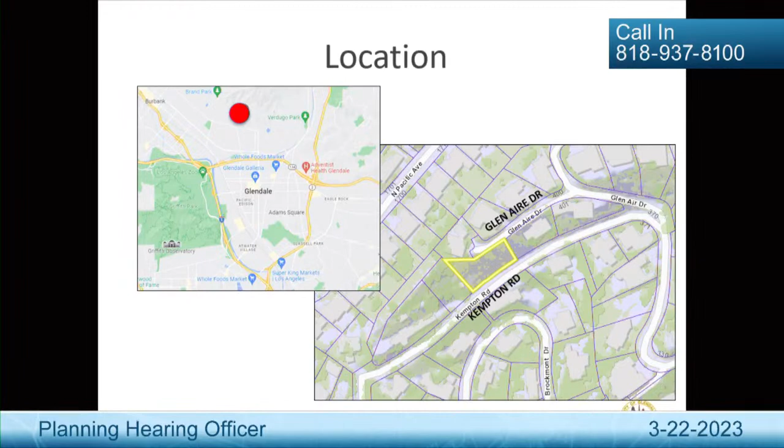Thank you, and good morning, hearing officer and members of the public. I'm Cassandra Pruitt. I'm the case planner for the project, as described by the hearing officer. The subject site is located in North Glendale at the southerly terminus of Glen Aire Drive. The lot fronts Glen Aire Drive at the top and Kempton Road at the bottom. The property features a 10,471 square foot vacant lot on a steep hillside. The average slope is about 69%.

The site is located in the R1R-2 zone, which means it's the restricted residential zone with floor area ratio District 2. And what that means is that the zoning requires a 15-foot setback facing each street, a 10-foot setback on the sides, and a maximum total floor area of 3,037 square feet. A new single-family home is exempt from review under the California Environmental Quality Act, and there are no protected indigenous trees located on the site.

2 oak trees are located to the west of the site, about 20 feet away, as indicated at the lower left of this slide. The site also features 2 easements, indicated by these red polygons here, and they're a storm and a sewer easement, and no construction can occur over those easements.

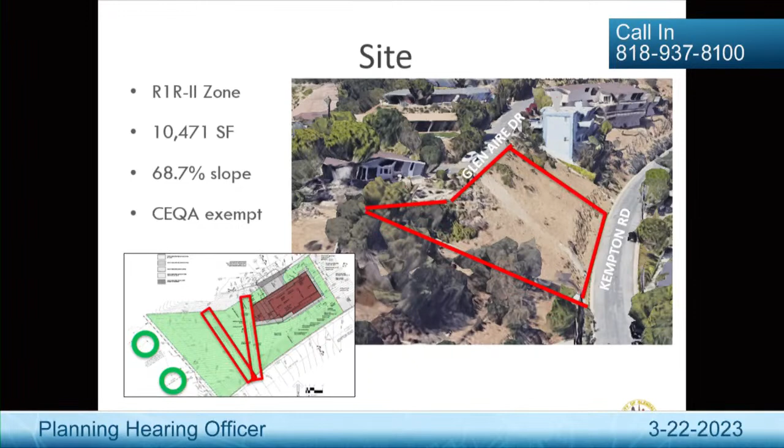Compared to other lots on the street, the subject site is shallower than any other on the street, since it is just over 60 feet deep at its narrowest point for approximately an 80-foot length. This results in a smaller buildable area, and because of the easements to the west, the 2 15-foot street front setbacks and the 10-foot setback at the side, the resulting buildable area is just 1,340 square feet.

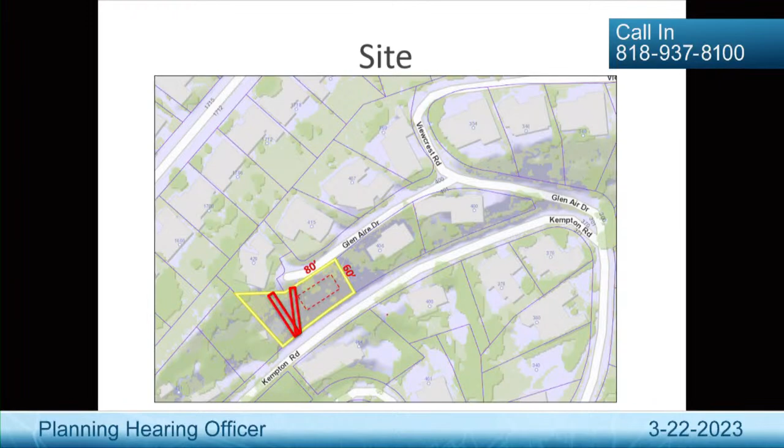Another feature of this site that impacts the development is that Glen Aire Drive has a narrow street width. Like other properties on the street, on-street parking will now be prohibited directly across the proposed driveway, which is located here on the slide, to ensure that vehicles can pass. However, the subject property still needs to have enough room to accommodate a vehicle temporarily while that vehicle is entering or exiting the site, and without that vehicle extending into the street and obstructing traffic.

In this case, there is a 3-foot to 5-foot wide area that's the public right-of-way outside of the roadway that helps to provide some area for a car to enter and exit the subject site, even if it has a shortened driveway. A further constraint in terms of the driveway is that the site slopes from east to west, in addition to sloping north to south.

So the driveway, as shown on the left of this slide, has different slopes at different points along the driveway. So it's sloping down at one point, level at another point, sloping up at another point. This results in less flexibility to design the driveway to comply with the maximum required slope standards, and it diminishes the ability to slope the driveway down even further to push the building into the hillside in compliance with the design standards.

To the north of the site, which is toward the top of this slide, Glen Aire Drive features one-story homes. To the south, below Kempton, are homes that have two-story volumes. To the east, there's homes with three-story volumes. And to the west of the site is a vacant lot, and beyond that, a two-story home.

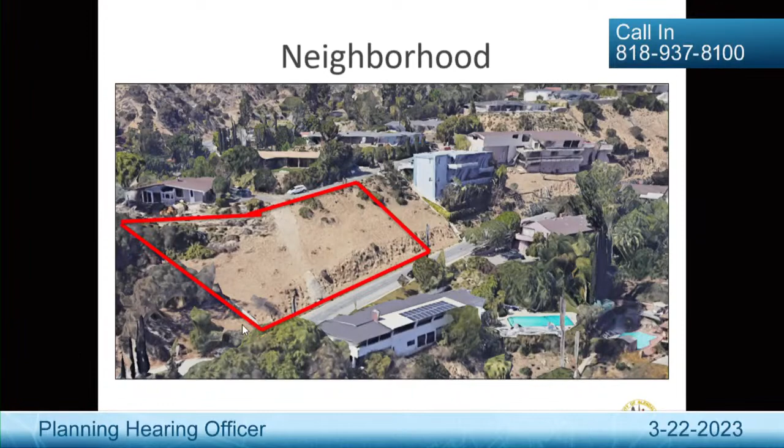As a note, there are 2 other properties on Glen Aire Drive right here that have non-conforming front setbacks. 429 Glen at the end of the road has a 9'6" front setback, and 407 Glen, a couple houses down, has an 8-foot front setback, and both of those were approved through variances.

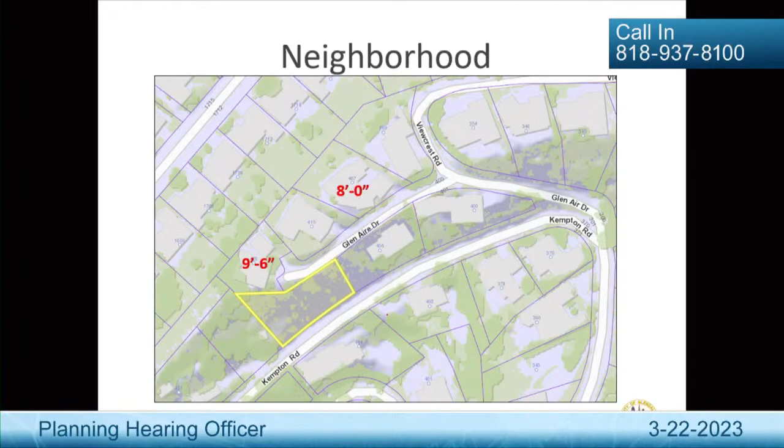The proposal under consideration is to build a 3-story, 3,430 square foot house, which includes a 503 square foot attached garage. 500 square feet of the garage is exempt from the floor area ratio calculation. The project proposal includes providing, as the hearing officer mentioned, a 10-foot front setback instead of a 15-foot front setback, a 15-foot driveway length instead of an 18-foot driveway length, and an 18-foot garage depth instead of a 20-foot garage depth. The house appears as a 1-story as viewed from Glen Aire Drive, which can be seen on the top right corner of the slide, and as viewed from Kempton Road, it appears as a 3-story volume.

The middle image on this slide is a good reference image for the issues the site has in complying with the development standards. On one hand, the front setback standard and the minimum driveway length and garage depth require the building to be pushed away from Glen as shown on the left red arrow. On the other hand, Glendale's comprehensive design guidelines call for the building to be pushed into the hillside and to step with the topography. The project is not able to comply with both of those standards while still resulting in a functional building design.

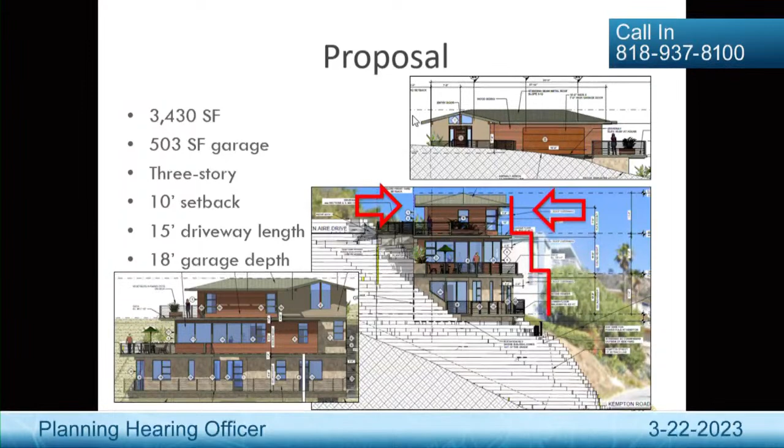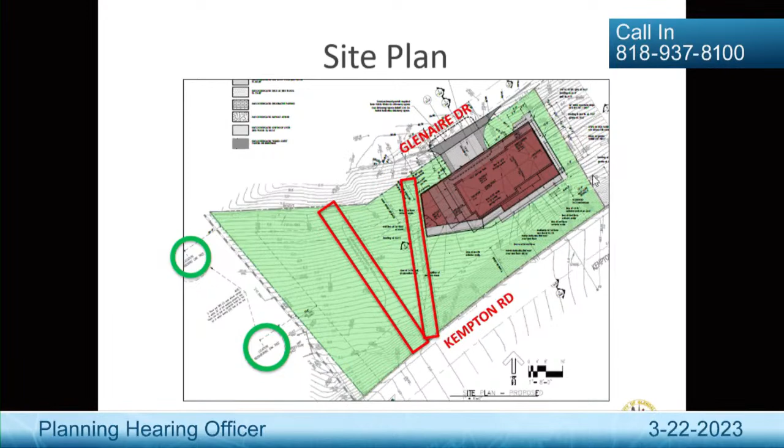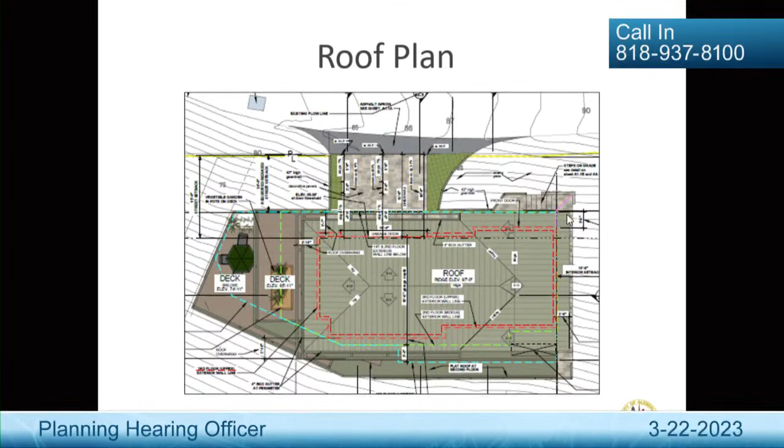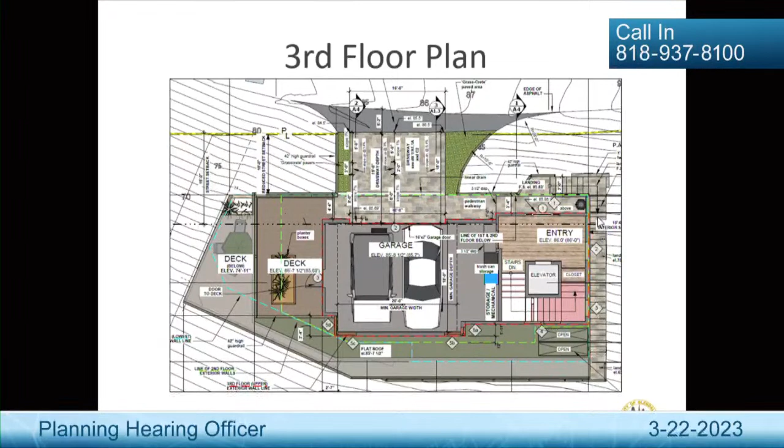The building is accessed from the 3rd and top level that is adjacent to Glen Aire Drive. The part of the building at the driveway entrance actually meets the 15-foot required setback. The rest of the facade ranges between about 13 feet to about 14 feet. The garage and entryway areas have been designed to maximize facade stepping in compliance with the design guidelines, and to maximize efficiency of floor area use. The second floor features a small deck area, which has been minimized in size to not wrap the entire building in order to comply with the design guidelines.

The first floor is similarly designed with reduced deck sizes and modest bedroom sizes. While this is not a review of the project's compliance with the design guidelines, what this shows is that the project's design is constrained and the locations and size of floor area are minimized to achieve the requirements of the design guidelines. So there isn't a lot of available area to remove in order to get the building to meet the setback and driveway standards.

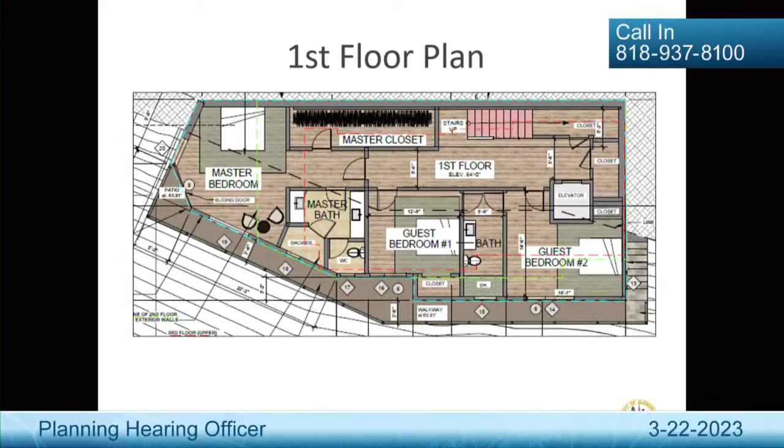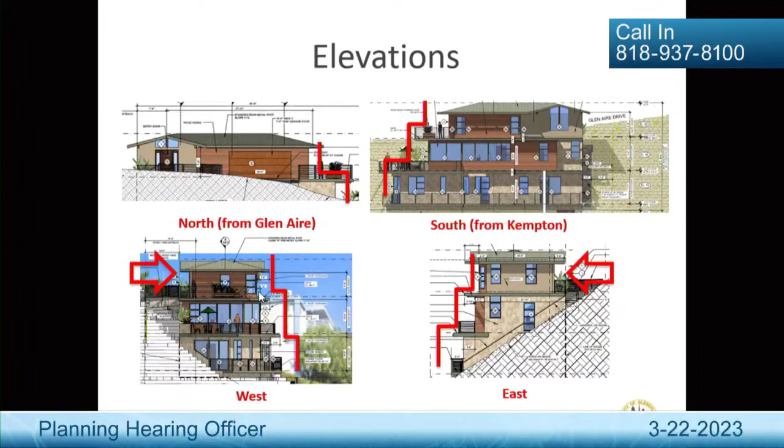And I will now run through the required findings of fact for a variance and summarize how the project demonstrates that they meet those. The first required finding of fact is that the strict application of the provisions of any such ordinance would result in practical difficulties or unnecessary hardship inconsistent with the general purposes and intent of the ordinance. Due to the numerous constraints on this site that I've outlined in this presentation, to require the project to comply with the required setback distance off of Glen Aire Drive would result in the building sticking out of the hillside and not complying with the design guidelines, which call for it to be pushed into the hillside and to step with the topography. If the building were to comply with both standards, it would become so narrow it wouldn't be practicable to occupy.

The second finding of fact is that there are exceptional circumstances or conditions applicable to the property that do not apply generally to other property in the neighborhood. The site has several exceptional circumstances not applicable to others in the neighborhood, including the shallow lot, 2 easements prohibiting any construction over them, having a steep slope of 69% that's not common to other lots on the street, and in combination with the 2 street front setbacks, having just a 31-foot deep potential building pad.

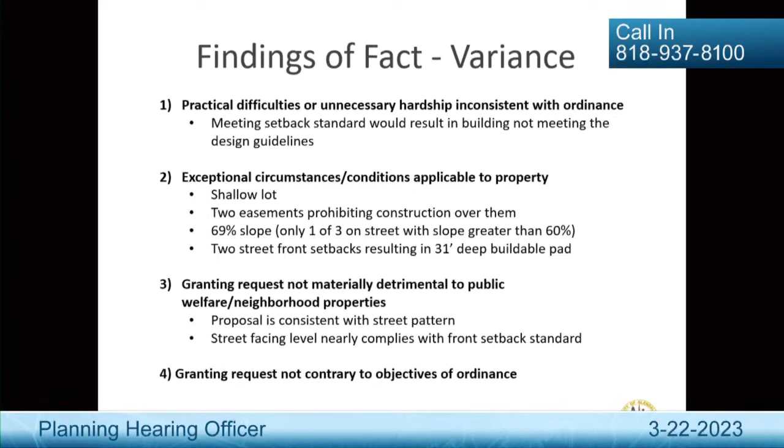The 2 administrative exception requests are for a minor variance in dimensions required for the driveway length and garage depth. Specifically, again, a 15-foot long driveway instead of an 18-foot long driveway, and an 18-foot long garage depth instead of a 20-foot garage depth. So I'll now run through the required findings of fact for an administrative exception and summarize how the project demonstrates them.

The first required finding of fact is that the granting of the exception will result in design improvements or there are space restrictions on the site which preclude full compliance with code requirements without hardship. The design improvement is that the building will be able to comply with the design guidelines, since without the exception it would not be able to comply.

The second required finding of fact is that the granting of the exception with any conditions imposed will not be materially detrimental to the public welfare or injurious to the property or improvements in such zone or neighborhood in which the property is located. This finding can be met because the project has been carefully designed to minimize any negative result from not complying with the standards. The driveway has been designed to incorporate a 3 to 5 foot area of the public right-of-way that is outside of the roadway, and which results in the equivalent of an 18-foot long driveway, which ensures sufficient access to and egress from the garage.

The project is also at the end of a dead-end street with minimal traffic, which minimizes potential conflicts with other vehicles. Additionally, an 18-foot garage depth is sufficient to accommodate a vehicle, as evidenced by the fact that the zoning code allows this depth of garage by right under certain circumstances. Finally, Public Works will require removal of street parking adjacent to the driveway, which is consistent with other driveways on the street, and which will ensure sufficient roadway width.

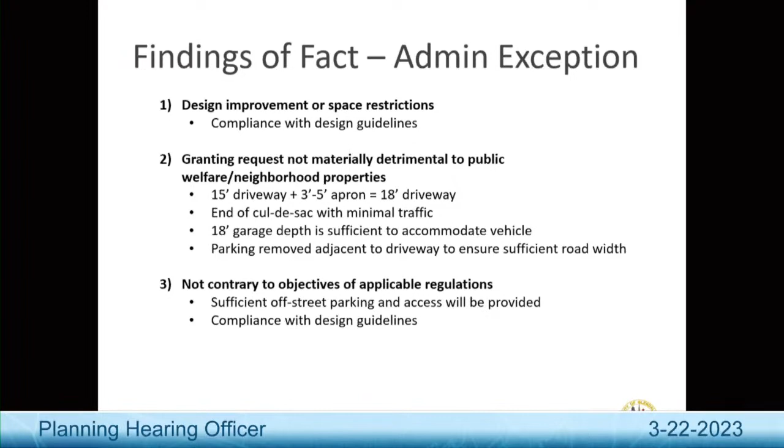The third required finding of fact is that the granting of the exception will not be contrary to the objectives of the applicable regulations. This finding can be met because the project will achieve the objectives of the ordinance to provide sufficient off-street parking with functional access to and egress from that parking. In conclusion, the requested variance and exceptions are sensible and afford the owner a fair opportunity in developing a vacant property similar to other residences in the immediate vicinity.

As a note, one public comment was received regarding the project and was shared with the hearing officer. He summarized it earlier. The letter is from a neighbor who lives 1.5 miles away from the site and who opposes construction that doesn't comply with the standards or significantly changes the look and charm of the neighborhood. As I believe has been shown in this presentation, the proposal is consistent with the neighborhood pattern and the requests for relief from code standards are reasonable.

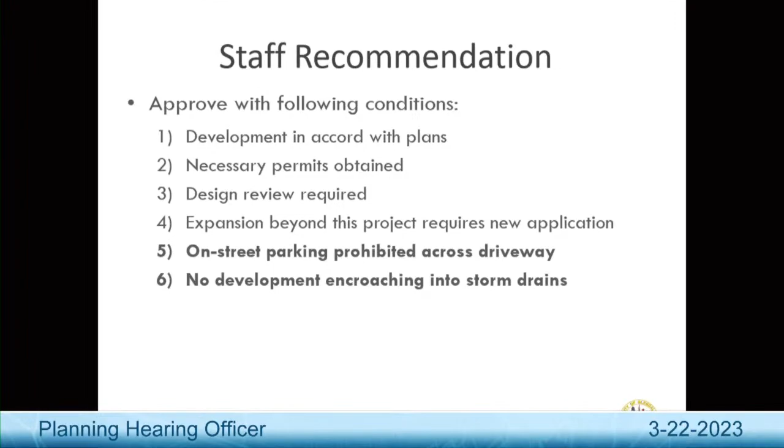Based on the information just presented, the staff recommendation is to approve with conditions, with the 6 conditions as described in the staff report and shown on this slide. 2 of the conditions are to restrict street parking adjacent to the driveway and to not build over the easements. And the remaining 4 are standard conditions of approval generally placed on all projects. That concludes my overview of the project. Thank you.

Thank you, Ms. Pruitt. I don't have any questions at the moment. Now I'd like to call up our first speaker, which is going to be the applicant, Mr. Von Trammell. May I ask you to come up to the podium? You've got 15 minutes to speak. Please state your name and your address. Yeah, let's give your quick presentation.

My name is Von Trammell. Address is 1912 Benicia Avenue, Los Angeles, California, 90025. And go ahead, if you have anything to speak, do you have a presentation? Just, thank you for all the work Glendale staff has done. My presentation will be a little bit repetitive, so I apologize for that.

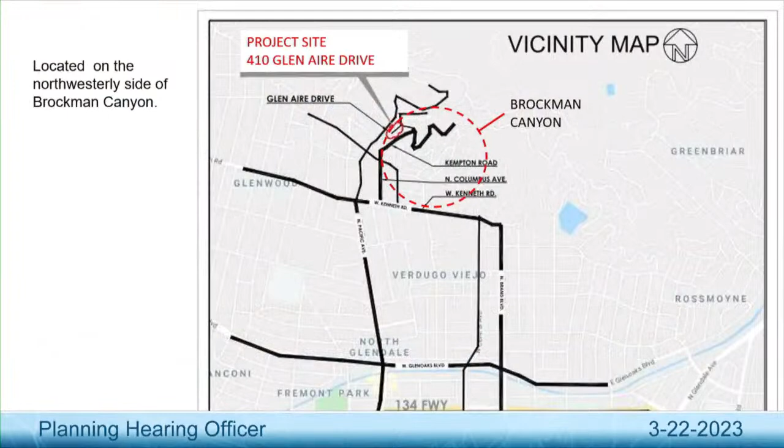So we are requesting the variance to reduce the street setback from 15 feet to 10 feet. The administrative exception to allow a 15-foot driveway instead of 18, and an 18-foot garage depth instead of a 20-foot depth. The property is located on the northwesterly side of Brockman Canyon at 410 Glen Aire Drive.

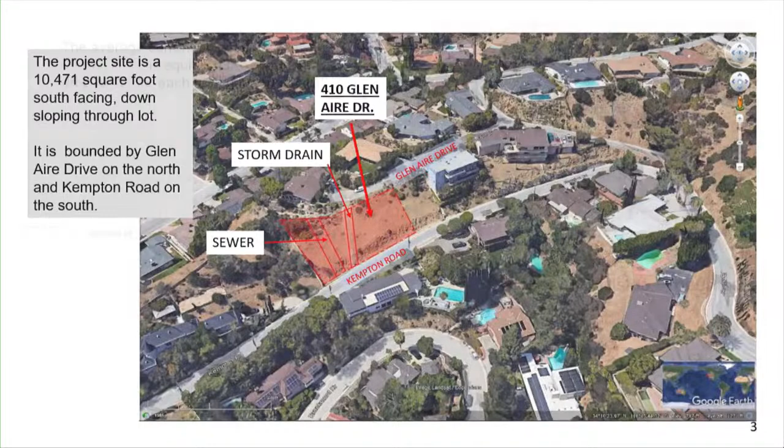The project site is 10,471 square feet, south-facing, downsloping through lot bounded by Glen Aire Drive on the north and Kempton Road on the south. It's a steep lot. The average slope is 69%, which is equivalent to a vertical drop of 12 inches for every 18 inches of run.

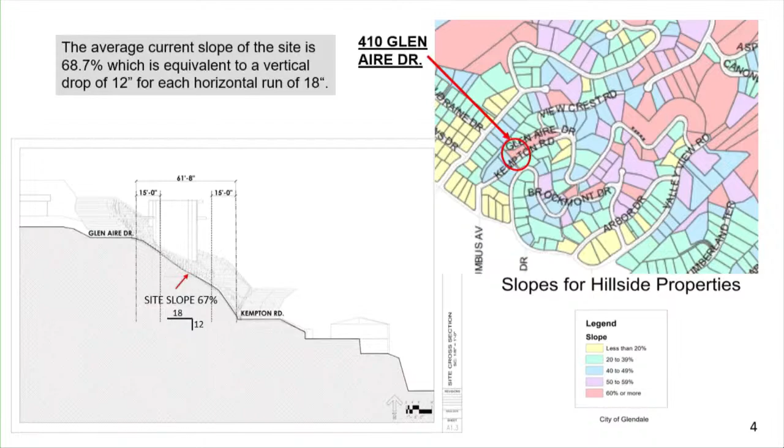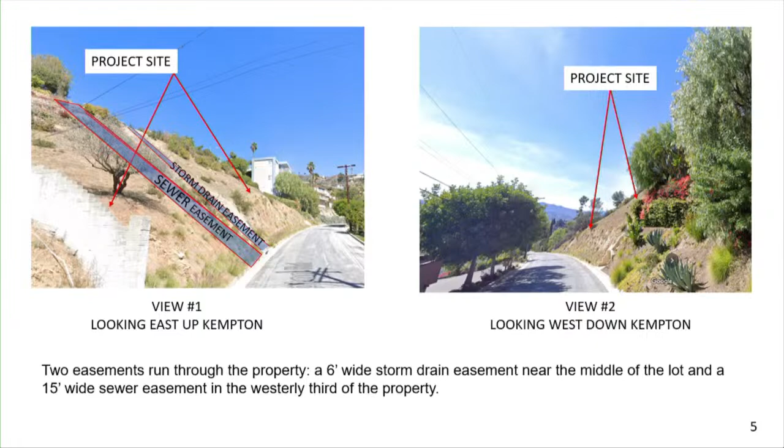These are some views of the site looking east up Kempton Road and west down Kempton Road. You can see the 2 easements that run through the property, a 6-foot wide storm drain easement near the middle of the lot and a 15-foot wide sewer easement in the westerly third of the property. These are views from Glen Aire Drive looking west and east down towards Kempton.

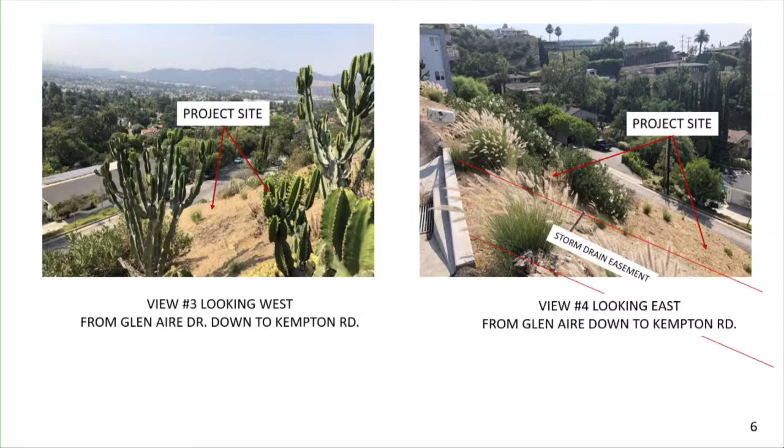The strict application of the provisions of the code would result in practical difficulties or unnecessary hardship inconsistent with the general purpose and intent of the ordinance. The proposed house is planned to be a 3,430 square foot, 3-story, single-family residence with an attached 2-car garage.

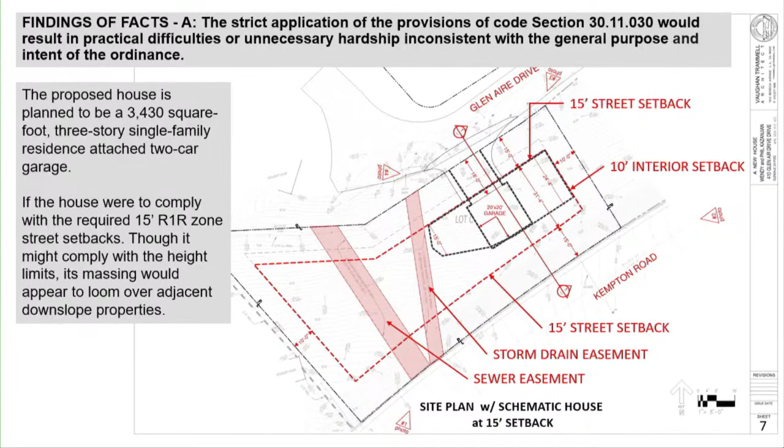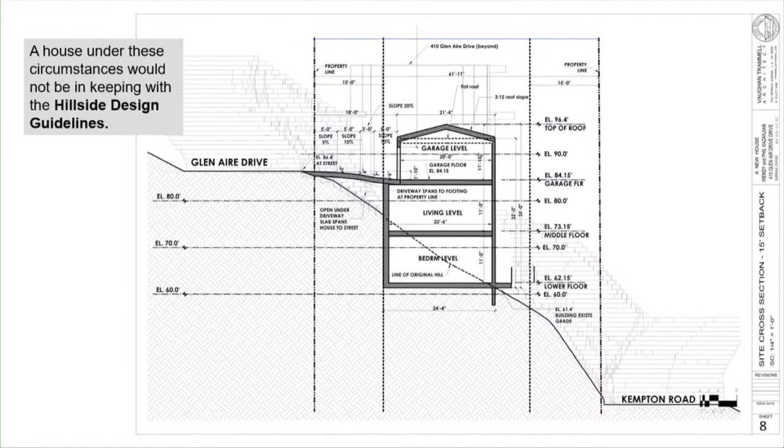A house with a 15-foot setback under these circumstances would not comply with the hillside design guidelines that specifically recommend new houses be terraced to reflect the topography and slope of the site. It also encourages building into the hillside to diminish visual impact of mass and scale, even if significant grading is required.

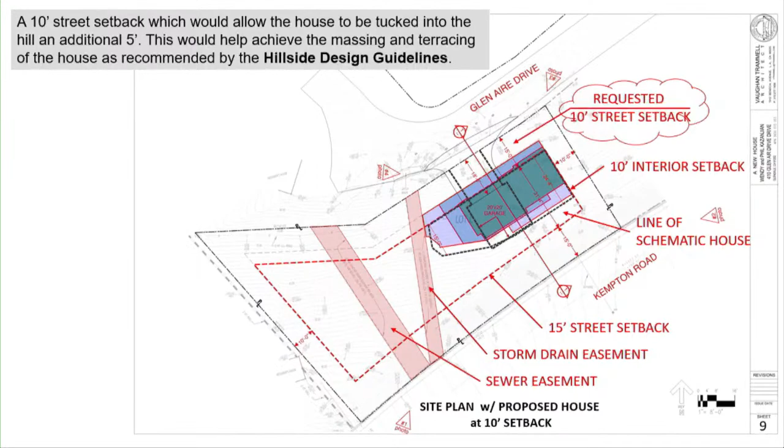There we go. The 10-foot setback would reduce the visual impact of the house, pulling it farther away from the slope and into the hill, and allow terracing of the building.

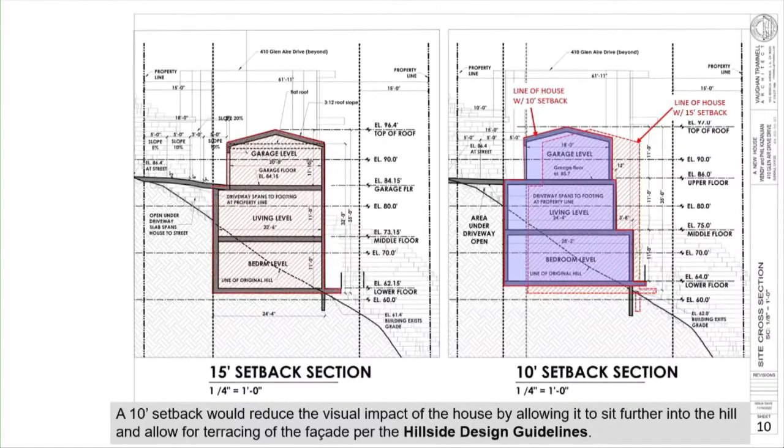Aside from the visual impact of new houses, the hillside design guidelines also state that prevailing setbacks of buildings on the street be considered, as well as code requirements. There are 2 houses on Glen Aire which have received past variances for reduced street setbacks, number 429 and number 407. A walk around the neighborhood shows that within 500 feet of the house, 6 houses have portions that are closer than 11 feet to the street, and a bit further away in the neighborhood, there are an additional 12 houses.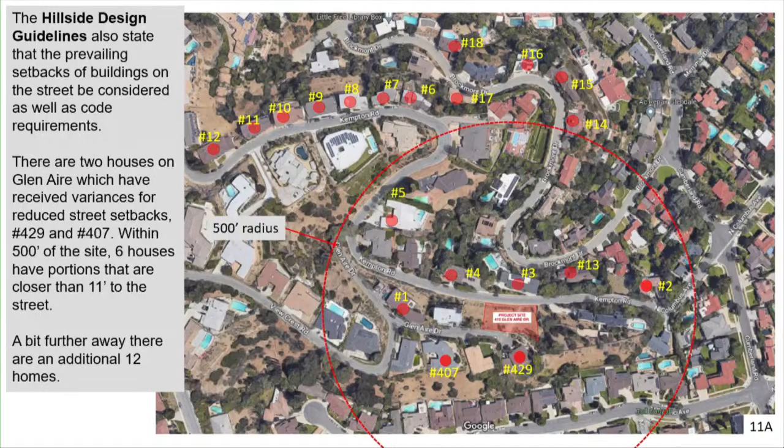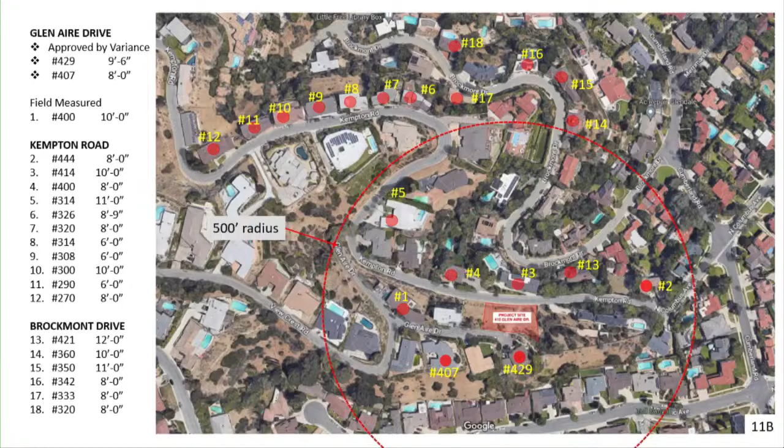This slide summarizes the houses that are closer to the street than 12 feet. These dimensions were obtained using a laser measuring device held at the curb, measuring horizontally to the house. Finding of facts B. There are exceptional circumstances or conditions applicable to the property involved or to the intended use or development of the property that do not apply generally to other property in the same zone or neighborhood.

Again, though the site is 10,471 square feet in size, there are 2 easements that cross the property from Glen Aire Drive down to Kempton Road, a storm drain easement and a sewer easement. These easements prohibit building on the westerly side of the lot. The steep slope limits where the garage can be placed. Measuring 38 feet off of Glen Aire for an 18-foot driveway and a 20-foot deep garage, the back edge of the garage would be 23 feet above the existing grade.

Though it might be possible to get the building to comply with the height requirements, it would not comply with the hillside design guidelines for reduced mass, scale, and terracing of the house. These 2 easements plus the building height limits reduce the available building area to only 1,340 square feet. The easement, steep topography, and limited building pad result in exceptional circumstances that do not apply to other property in the same zone or neighborhood.

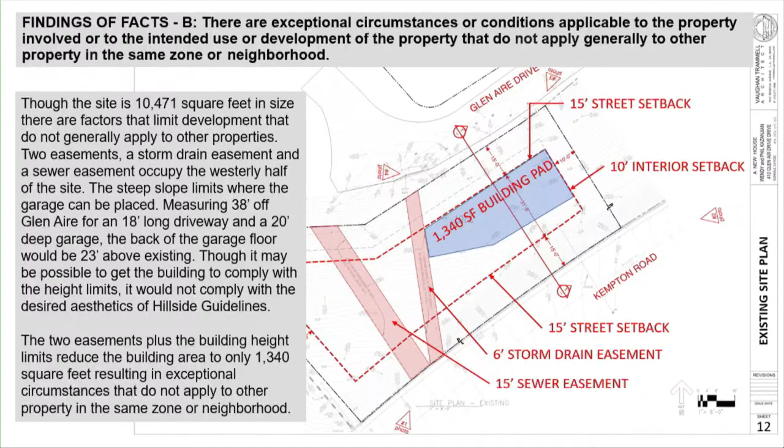Findings of fact C. Granting of the variance would not be materially detrimental to the public welfare or injurious to the property or improvements in such zone or neighborhood in which the property is located. In general, the intent of the front setback requirement is to maintain an attractive neighborhood with consistent streetscape and rhythm, adding visual relief to the street. This requirement is critical in more typical housing arrangements where homes are aligned next to each other and address the street in the same way in a repeating pattern.

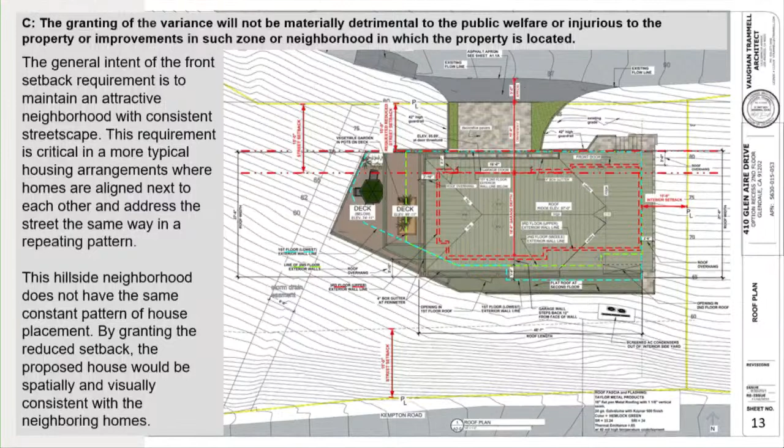This hillside neighborhood does not have the same consistent rhythmic pattern of house placement. By granting the reduced setback, the proposed house would be spatially and visually consistent with the neighborhood homes, which have varying street setbacks, often less than the 15-foot code requirement. To avoid the appearance of the building looming over the downslope of the subject site, the requested street setback reduction, the shorter driveway and shallower garage will allow the building pad to be located closer to Glen Aire and be cut further into the hillside.

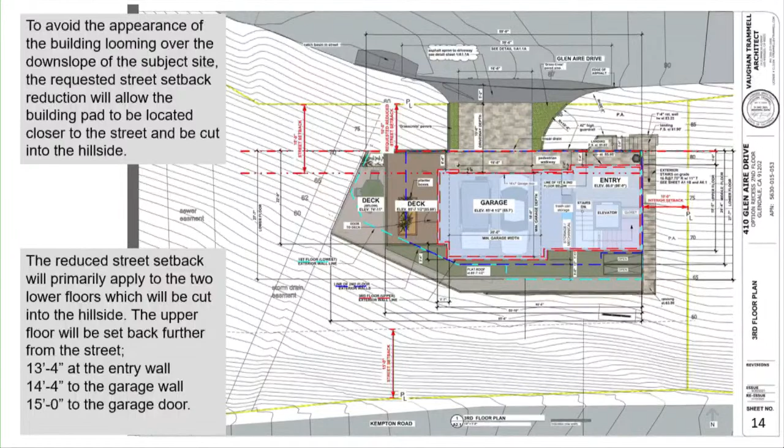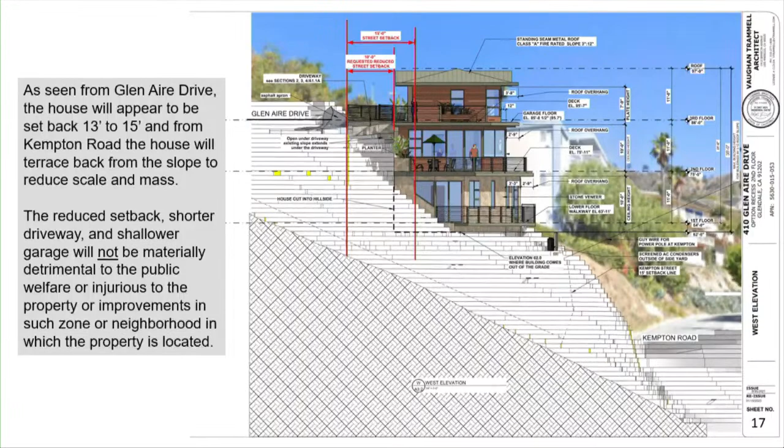The reduced setback will primarily apply to the 2 lower floors, which will be cut into the hillside. The upper floor will be set back from the street 15 feet at the garage door and 13 feet 4 inches at the entry. As seen from Glen Aire Drive, the house will appear to be 13 to 15 feet set back from the street. From Kempton Road, the house will terrace with the slope to reduce the scale and the mass. Therefore, the reduced setback will not be materially detrimental to the public welfare or injurious to the property or improvements in such zone or neighborhood in which the property is located.

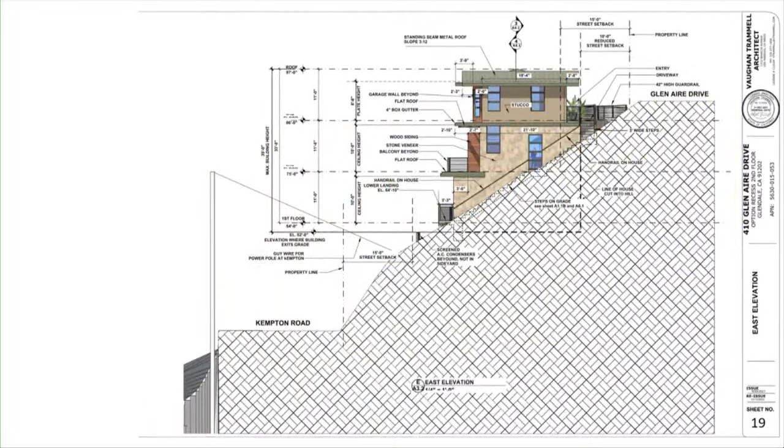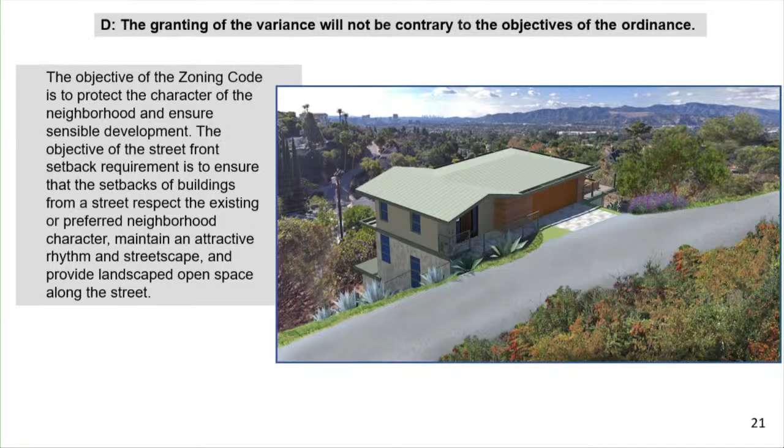This is the west elevation and the east elevation, and the house is seen from Glen Aire. Finding of facts D, the granting of the variance will not be contrary to the objectives of the ordinance. The objective of the zoning code is to protect the character of the neighborhood and ensure sensible development. The objective of the street front setback requirement is to ensure that the setbacks of buildings from street respect the existing or preferred neighborhood character, maintain an attractive rhythm and streetscape, and provide landscape open space along the street.

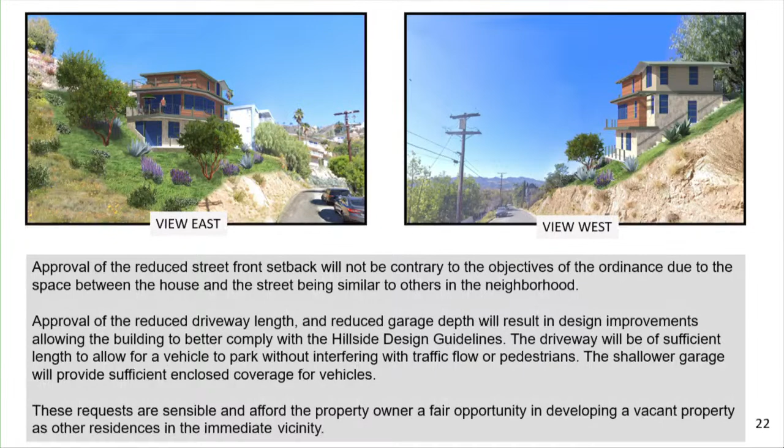Approval of the reduced street front setback will not be contrary to the objectives of the ordinance due to the space between the house and the street being similar to others in the neighborhood. Approval of the reduced driveway length and reduced garage depth will result in design improvements allowing the building to better comply with the hillside design guidelines. The driveway will be a sufficient length to allow for a vehicle to park without interfering with traffic flow or pedestrians, and the shallower garage will provide sufficient enclosed coverage for vehicles. These requests are sensible and afford the property owner a fair opportunity in developing a vacant property as other residences in the immediate vicinity. Thank you.

Thank you, Mr. Trammell. I do have some questions, if I may. Sure. I can tell this is a very challenging site. It has a very steep slope. And I understand why you're requesting a setback for the building to go as close as 10 feet. I do understand that, and I can see that being developed up and down the street. So the upper floor levels will be set back. I think the garage would be set back 15 feet, but then portions of the podium of the floors down below will act as part of the driveway. But levels 2 and 3 down below, which you would see from Glen Eyre, would be encroaching into the 15-foot setback. So I can understand why we're doing that.

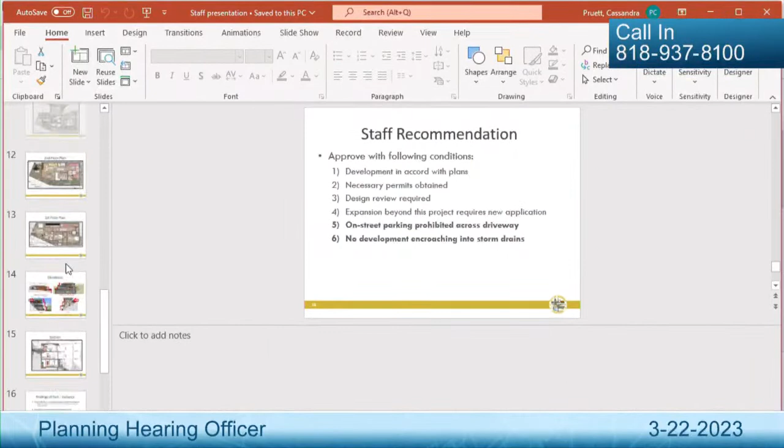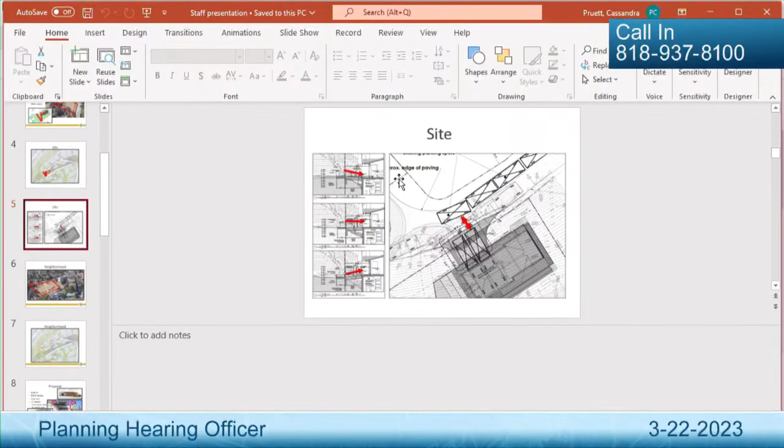Is this the one on the slide? That should be it. Correct. Okay, so what I wanted to mention is in this slide, you see a relatively flat driveway, but in my presentation, I had shown a slide that basically is demonstrating that the driveway actually slopes down in one part and up in another part. So the driveway is sloping not just from north to south, it's also sloping sideways. So they're proposing the finished surface to do this. It's a warped driveway because the street is sloping 1 foot, 2 feet within that 16.

Right, so the driveway is sloping in both directions, which makes it very difficult to meet the transition slope requirements. This design, he spent a lot of time adjusting it and readjusting it to get the driveway slopes. It was almost going to be another variance request. So what I was trying to demonstrate on this slide was just that it was already very difficult for it to achieve the transition slope requirements, which shows that there's not a lot of flexibility to change it even further. That's what I wanted to chime in.

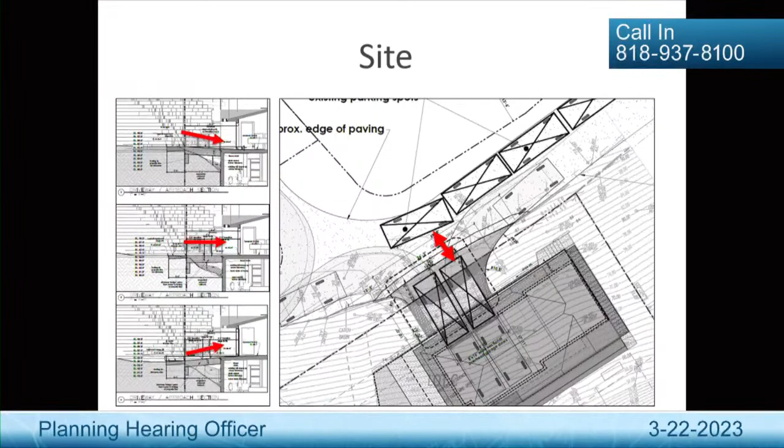So are the proposed slopes at the maximum, at 20 and whatever it is? What our code allows? Well, the transition slopes is the second part that's required, and he's barely meeting the transition slopes. Okay. I mean, I don't see him on here, and I'd love to see some analysis. I'm not saying yes or no. I just want to grasp my head around it, and if we could get the most achievable out of the code for the neighborhood, because the code is there for a reason, and I would love to have compliance to the greatest extent. That's the reason why I'm asking these questions, because I can tell that a lot of care and detail has gone into it. So I just wanted to pick the brain here in our short amount of time.

I think I can kind of look at this later on when I take this into submission. But thank you so much. I know it's very complex, and I appreciate you answering my questions. Is there anything else that you would like to discuss before I call? There is another sheet that is specifically for the driveway. Sure. I think you'd have to keep going. Maybe go back up. No. There's one that has the driveway section cuts, all three of them. I think it's the other way. There.

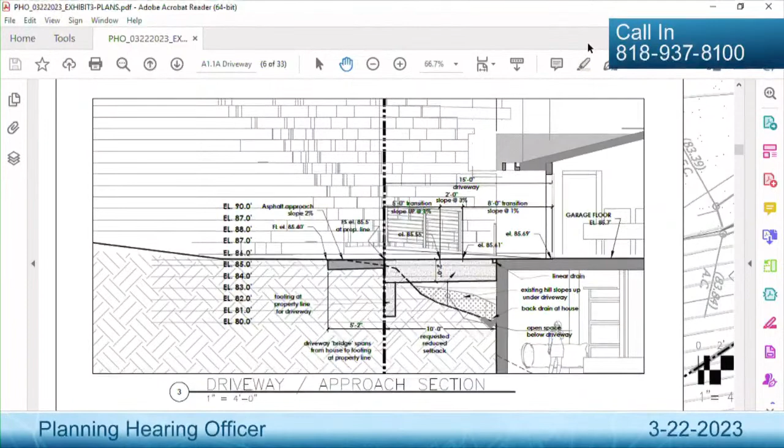So this is the section at the east side of the driveway. There's a section cut at the center of the driveway and a section cut at... Hold on one second. Let me get there so I can understand what the section cuts mean. Which sheet are we on, Ms. Pruett? A1.1A. Thank you. So then I just want to see the reference cut so that when you explain this, I fully understand it. I appreciate that. 2, 3, 4. Okay, appreciate it. Thank you. Please continue. I want to get my bearings.

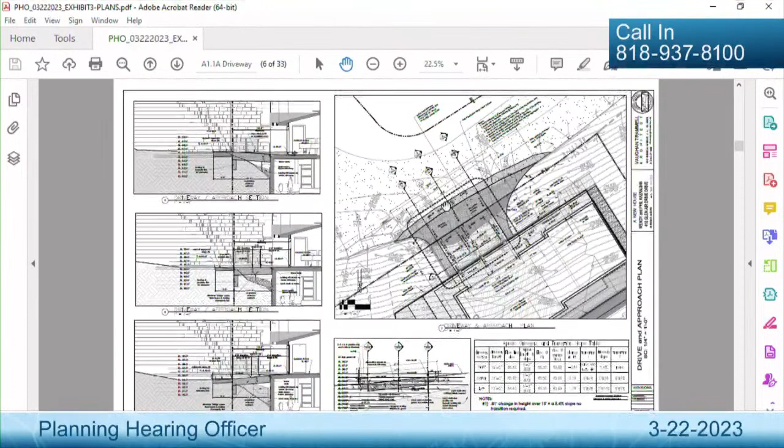Just saying that we tried to meet the transition requirements and provide safe access from the street to the garage. I appreciate these sections because in 2D I can't see it; I just look at the elevations on the street, like the top of curb, and I look at the finished floor. I know it's a 2 foot, but with these sections I understood the section I was referencing and focusing on. I know this is just one point of reference, and I do appreciate you providing the analysis and fleshing this out. That's all.

Did you have anything else? It seems like you were done, Mr. Trammell. No, I'm good. Okay, thank you. I'd like to call up the next speaker. It's going to be Mr. Irvin Tarkanian. I hope I got that correctly.

Hello, good morning. My name is Irvin Tarkanian, residing at 400 Glen Air Drive, Glendale, California, 91202. I am the next door neighbor of Phil and Wendy, and just wanted to say that I fully support this project. Seeing these renderings, I believe it will add beautifully to the neighborhood. They're investing a lot of their time and money into it. I believe I can invest a little bit of patience for the construction. I myself have been a contractor for over 20 years. Did a lot of school projects around Glendale, Lincoln Elementary, Verdugo Woodlands, and so forth.